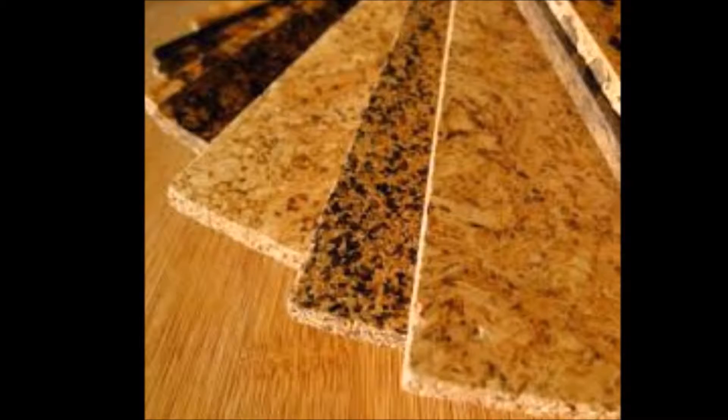Our team utilizes current technology, with innovative project management software to collaborate and manage ideas. The software allows our team to plan and manage tasks, track and share large amounts of data necessary for collaboration.

Smartsheet allows our team to manage schedules. It tracks times and specific tasks, and allows AVA to forecast and aid in the tracking of construction progress.

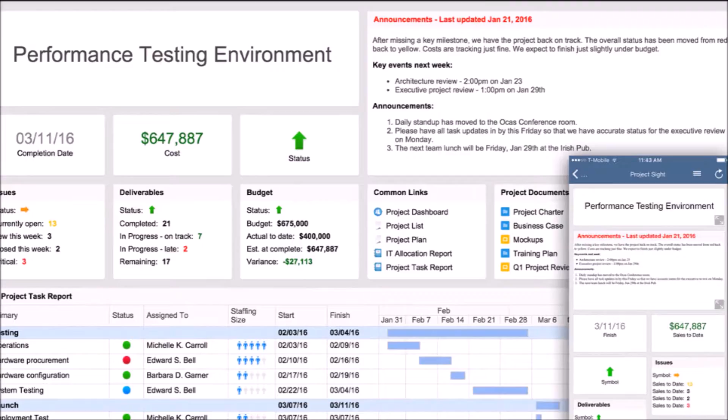The AutoCAD InDesign allows multiple users to share and collaborate and create important elements of design. AVA Engineering uses collaborative technologies to bring a sustainable future to you.

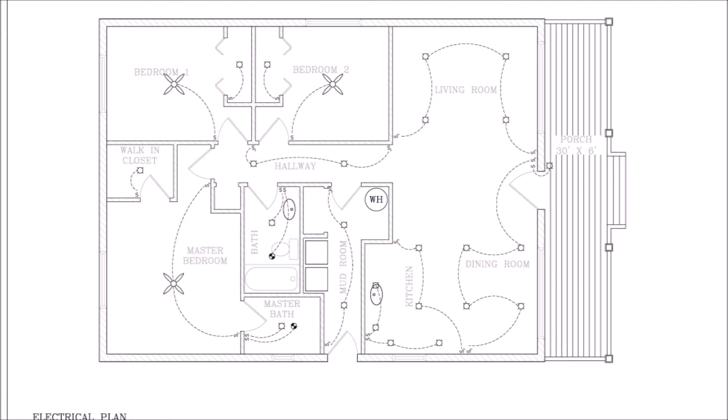National University wanted to design a 3-bedroom, 2-bath living space that is green and sustainable. The engineering staff at AVA Engineering utilized their expertise with sustainable construction to create a single-family dwelling located at 9388 Light Wave Avenue in San Diego, California.

Design and construction of green building was the primary focus of this project.

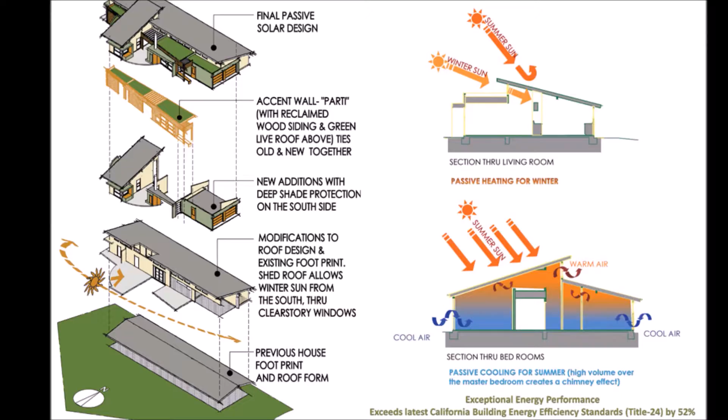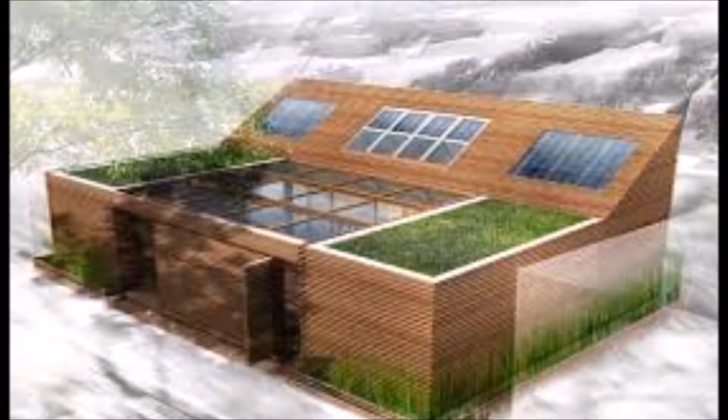Trust in our relationship. Our relationship begins with the customer at the design process. AVA Engineering collaborates directly with you, the owner. AVA has an obligation to ensure the design meets your expectations.

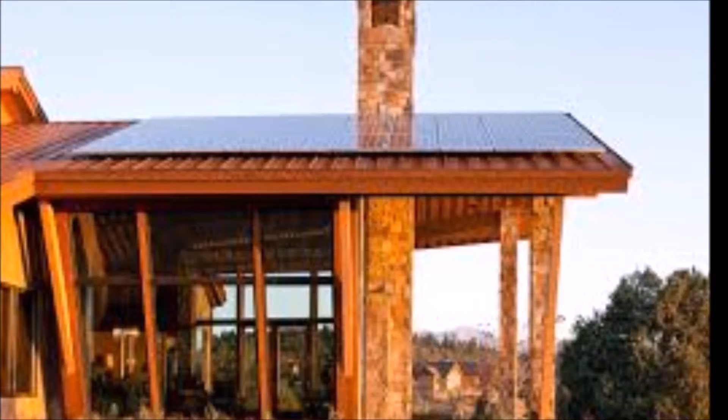AVA specializes in design and construction of sustainable residential designs customized to each client. AVA combines modern technology with the experience to create a design that you can trust.

Trust: a charge or duty imposed in faith or confidence, or as a condition of some relationship.

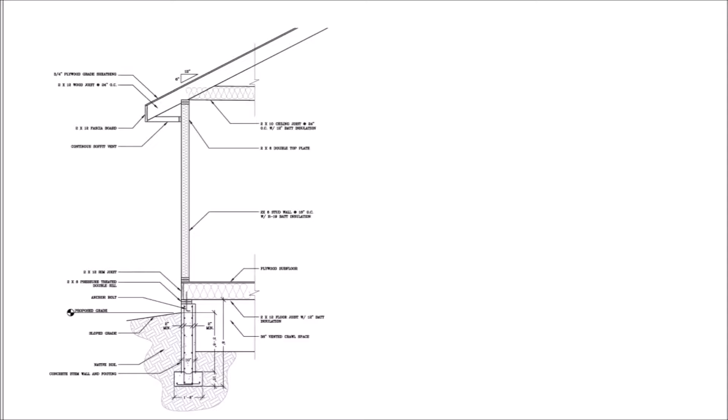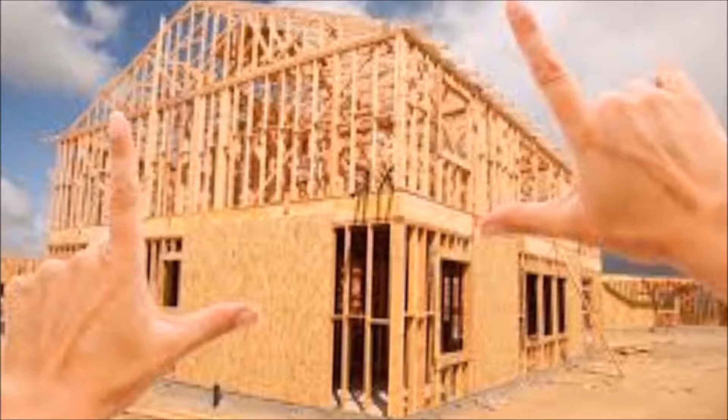This is Victor Gruber, Lead Quality Engineer and Project Engineer. And to speak more on green building, our team lead Design and Engineering Project Management is Andrew Dalrymple.

What is a green building? A green building is an environmentally sustainable building designed, constructed, and operated to minimize the total environmental impacts.

Where does green building start? When creating or designing new projects, it is important to have an understanding of the concept of green building. Once we understand the concept, we can then make an educated decision on our path to the future.

AVA Engineering begins each project with you. AVA Engineering provides the tools, but you are the one that must decide which path to travel.

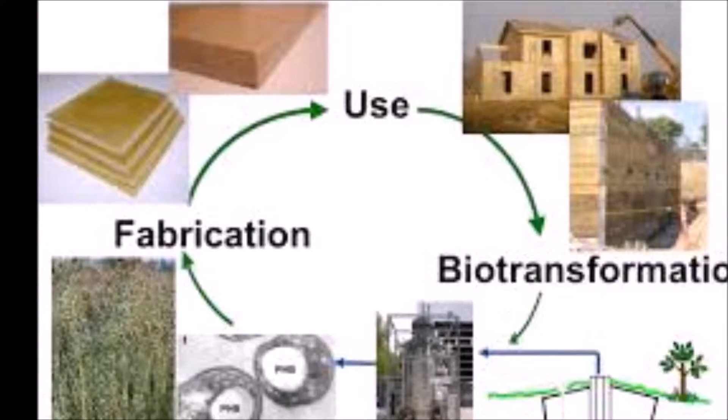Green projects start with basic design and space. The usable space should always be the first thing to consider. Consideration about the size of our footprint should always be a main focal point.

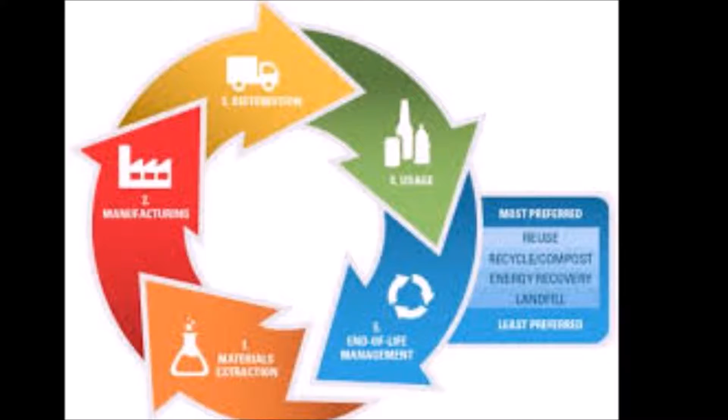Once the design has been chosen, the green building experience begins immediately. Excavation should be used on-site as opposed to removing excavated materials. The materials we utilize should be recycled and low VOC whenever possible.

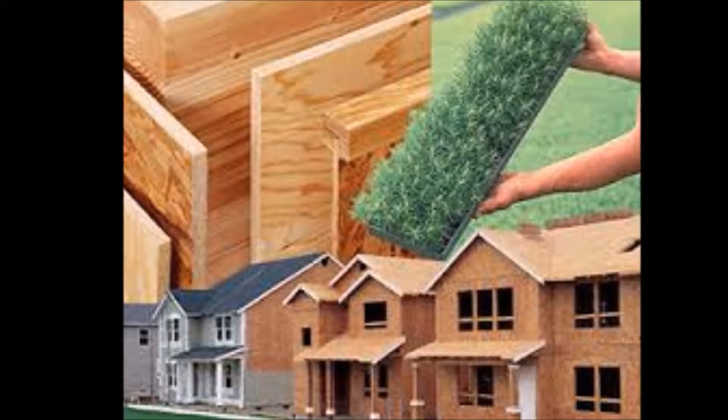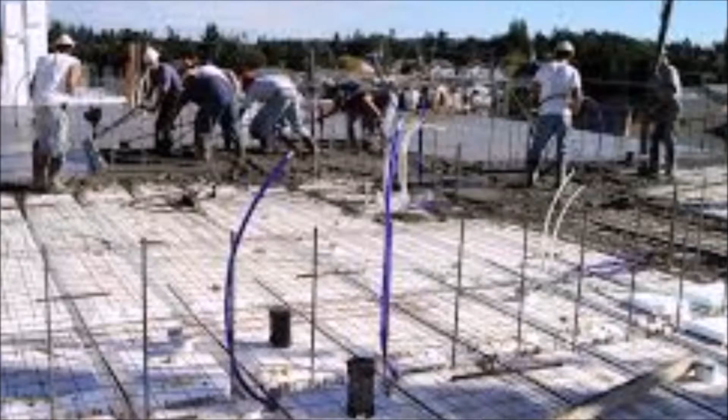As an example, concrete slab specifications: the framework should be reusable whenever possible. Form release agents should be vegetable-based, without petroleum solvents. The form supports 100% recycled plastic content. Alternative insulated concrete forms, ICFs, are meant to be left in the ground after the concrete has cured.

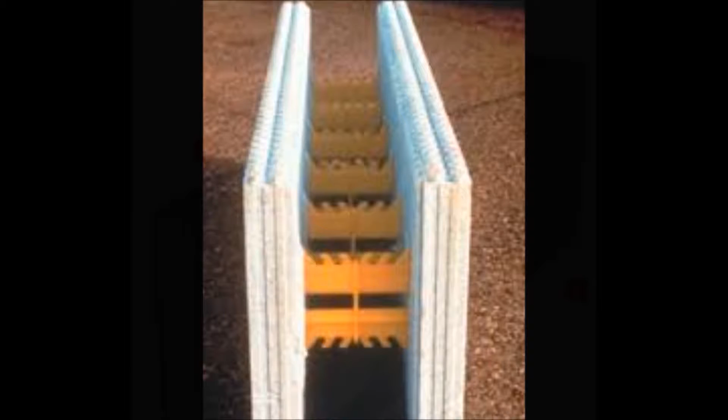Concrete specifications include mandatory recycled material, also low VOC mixtures. We will expand on low VOC in a minute. The concrete admixtures should be verified bio-based curing agents, with no calcium chloride. Reinforcing bars, rebar, with a minimum 50% recycled content. Concrete joint filler strips made with cork or other approved materials.

Materials are an important part of green building. You can trust AVA Engineering to use the right materials for your project.

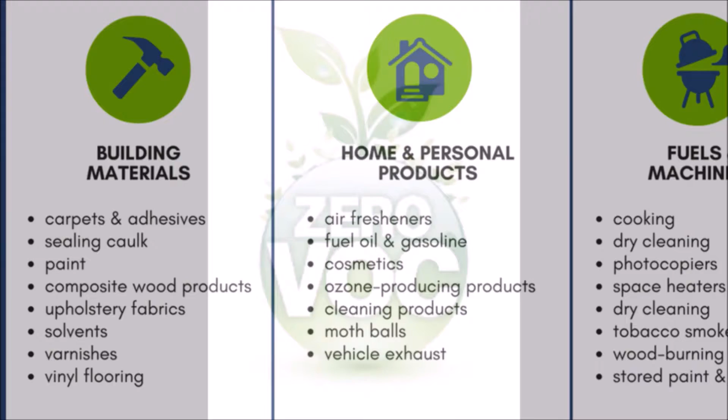Low volatile organic compounds, VOCs, are organic chemicals that have high vapor pressure at ordinary temperature. They have large numbers of molecules that evaporate or sublimate and enter the surrounding air. Common chemicals you may know are benzenes and formaldehyde. Most common long-term VOCs do not have acute toxicity side effects, meaning we do not notice we are in trouble until it is too late.

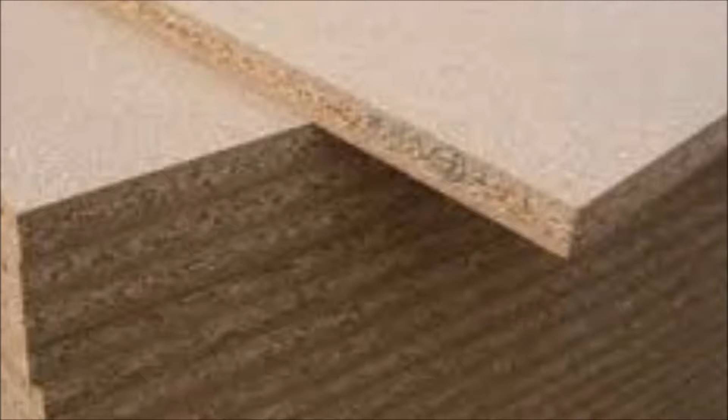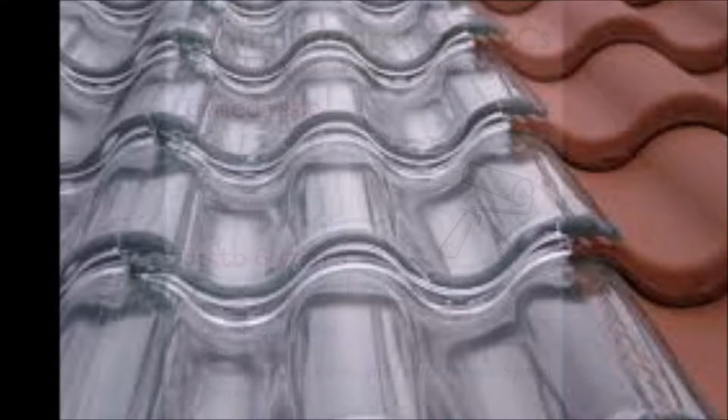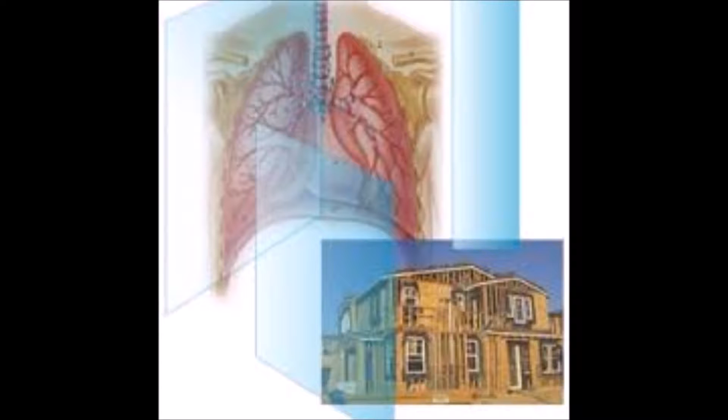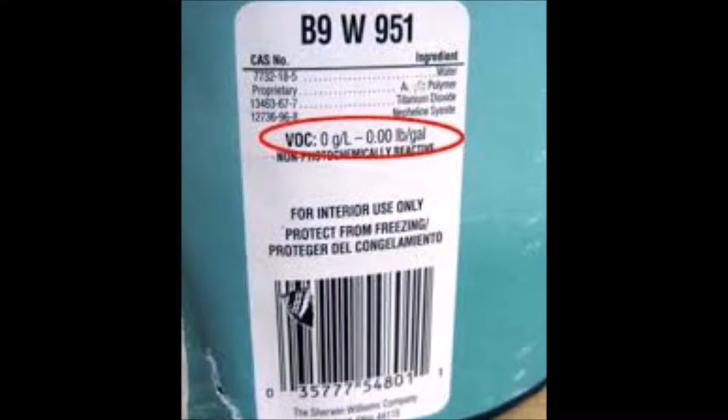Indoor VOC sources include many building materials such as carpet, composite wood products, insulation, paints, and adhesives. There are code requirements and established guidelines for some low VOC products. In contrast, low VOC materials are formulated to reduce off-gassing of hazardous and potentially flammable vapor emissions. Low VOC building products benefit the health of those installing such materials, in addition to long-term building occupants. Reducing the use of materials that emit pollutants is the most effective way to improve indoor air quality.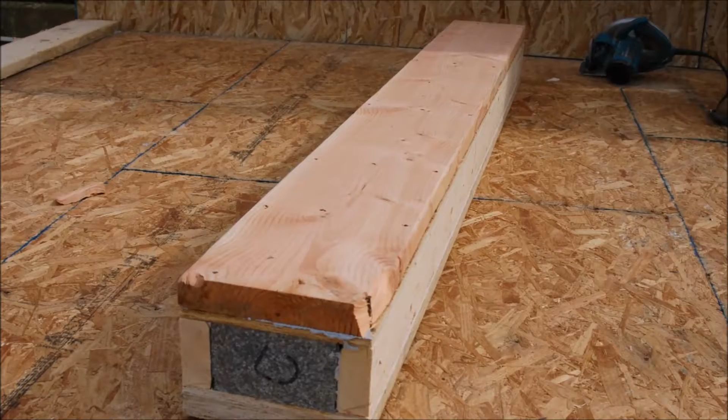AVA Engineering Materials Specifications: wood products shall be treated with chemicals that do not contain arsenic or chromium. Headers made of foam insulation sandwiched between wood veneers use wood efficiently and provide better thermal insulation. The EPS foam cores are non-ozone depleting.

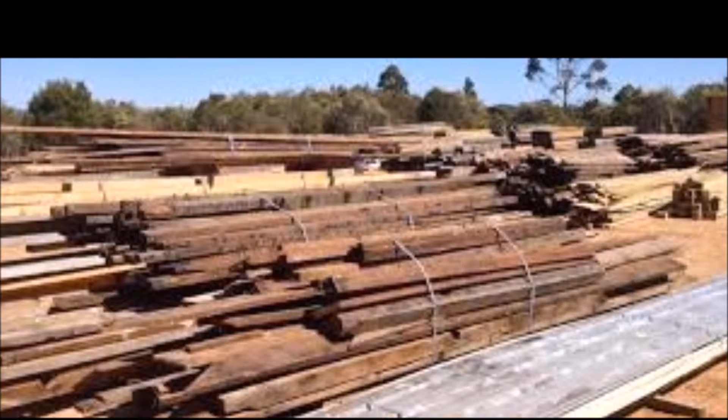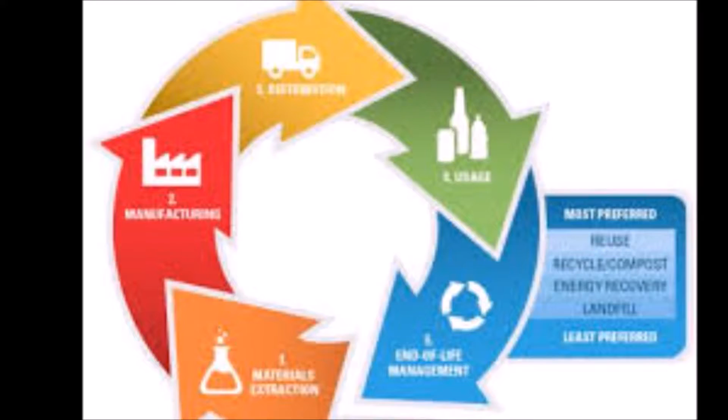Recycled fiber rock panels are made from synthetic gypsum, perlite, and recycled newsprint paper with a total recycled content of 95%. Murco Wall Products makes a hypoallergenic powdered dry mix all-purpose joint and texture compound that is non-VOC and does not contain any preservatives. There are also 100% recycled ceramic tiles with organic epoxy adhesives, and bamboo flooring from a sustainable source.

These are just a few of the specifications that can make a big difference when planning for the future. Trust in AVA to use the right materials for you, your family, and your future.

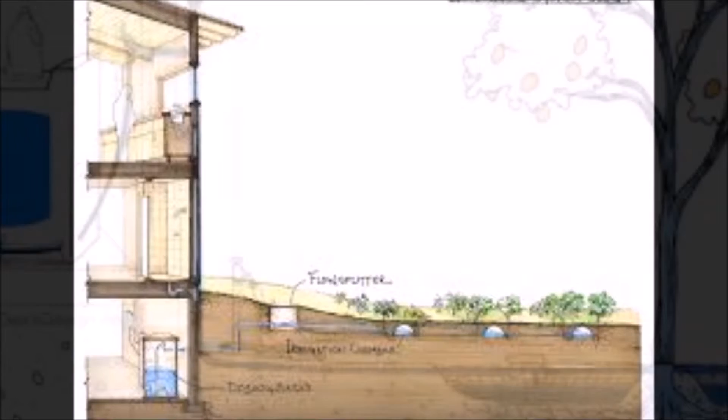Trust is defined as a charge or duty imposed in faith or confidence, or a condition of some relationship. Part of our relationship is expertise in green building design, designing options such as a gray water system. The gray water system collects water from the showers and sinks and runoff from the roof. The system has chlorination and overflow prevention capabilities as stated in the specifications. It uses a drip system for irrigation and has the option for leaching or direct release into the building sewer.

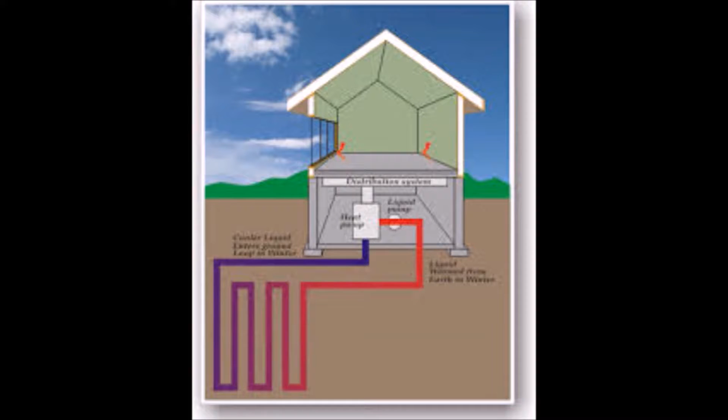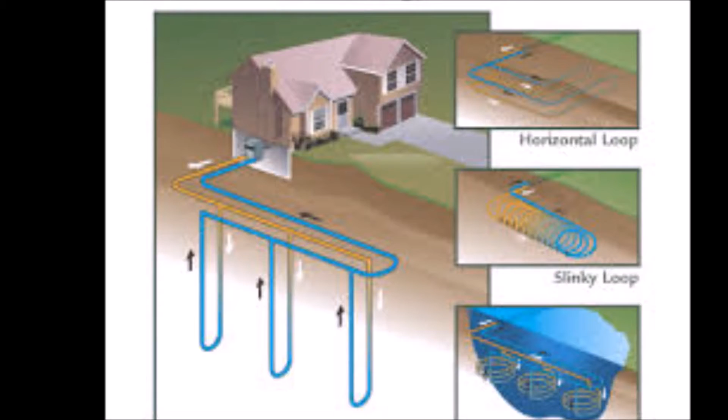Another option is geothermal cooling and heating. The system uses deep drilled wells and the Earth's natural stable temperature to either heat or cool a residence. It uses enclosed hydronic tubing manifolds and circulates heating or cooling water throughout the house and through wells drilled under the foundation of the residence. This unit lasts longer and requires less service compared to traditional HVAC units. Whole house fans and underfloor spaces will be vented and used to help efficiently cool and heat the interior environment.

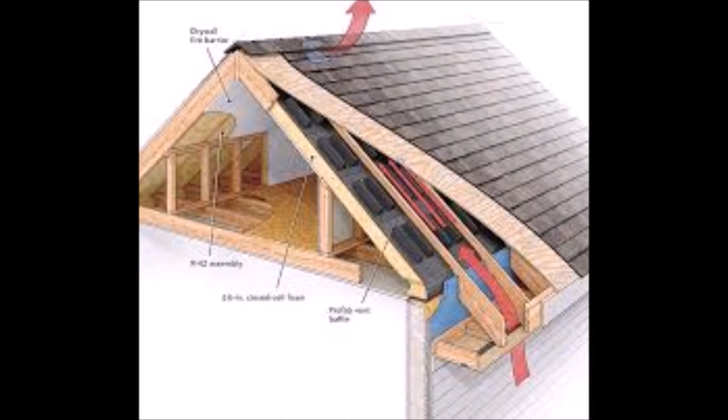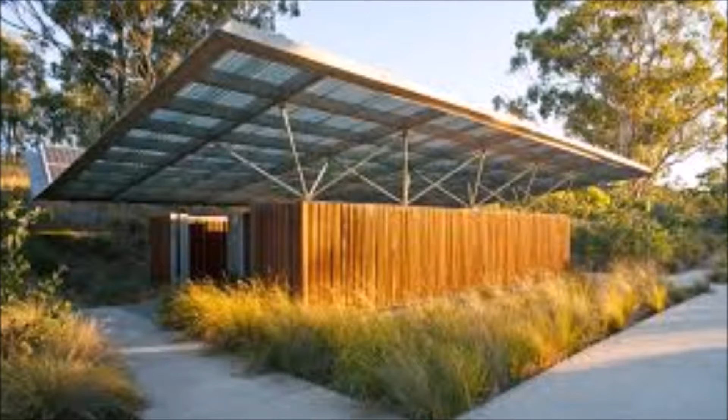Solar will be installed on the roof. This will aid in the sustainability aspect of the residence and will offset most electrical usage. The yards will have low maintenance and low care landscaping that is native to the local area.

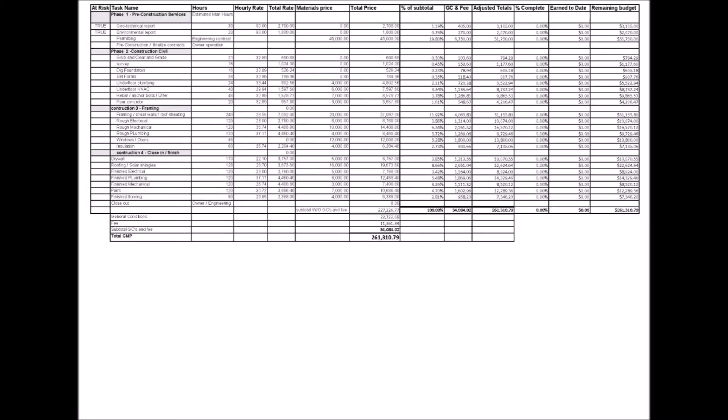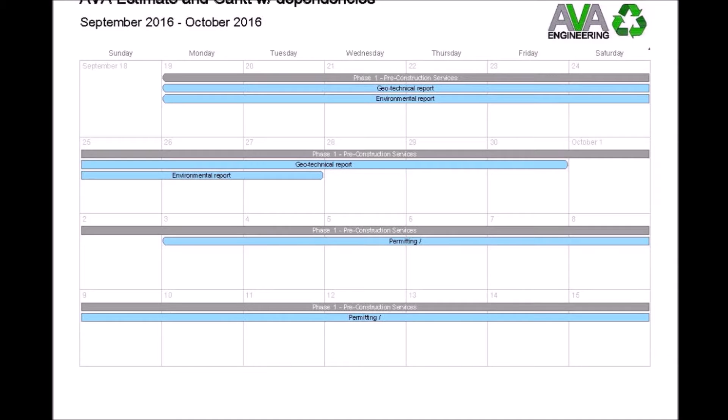Trusting the AVA engineering project team not only deals with construction principles, but financial concerns as well. Trust is important when it comes to financial matters for your future. From day one, AVA Engineering has created detailed reports for budgeting, project labor costs, and construction timelines. This is where technology becomes important.

Real-time project tracking through Smartsheet allows all parties to track production. REV5 project management software allows tracking of project milestones, management tasks, tracking schedules, workflow, and any changes during the construction process. Trust AVA to build your future.